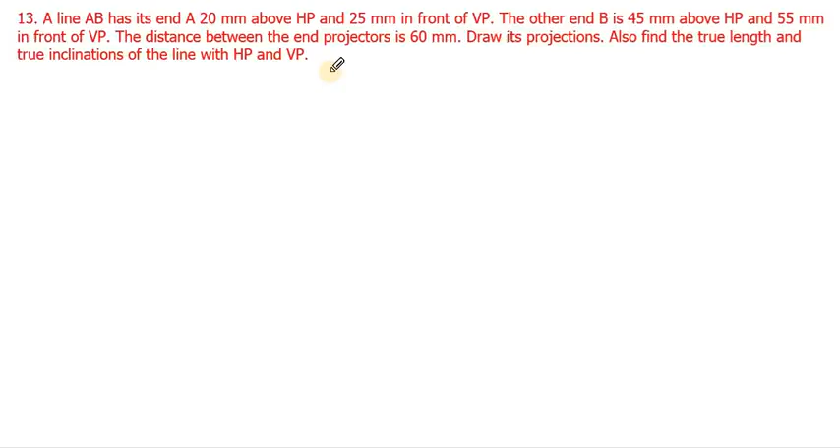So in the previous video we have seen a typical problem on projection of lines where the true length of the line has been given and we have calculated the true inclination with HP and VP. But here the true length is not given. We have to calculate the true length and also true inclination with HP and VP. So for that they have given end projector distance, that is 60 mm. So keeping this as a reference, we are going to calculate true length and true inclination and we will proceed with the projection of lines. So let us see how to do this.

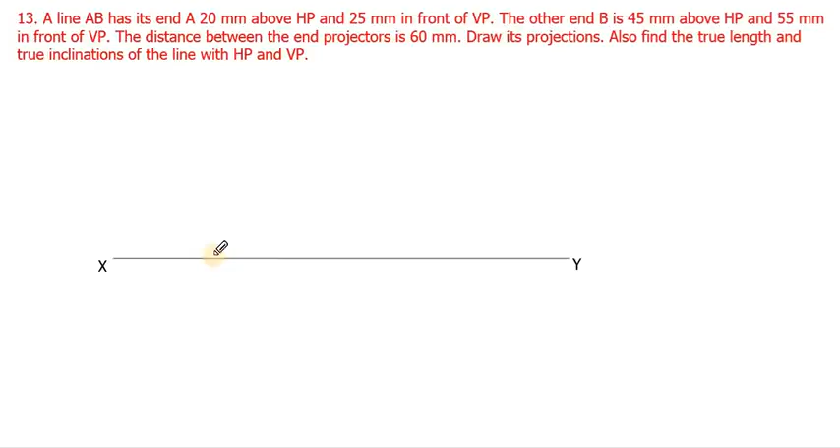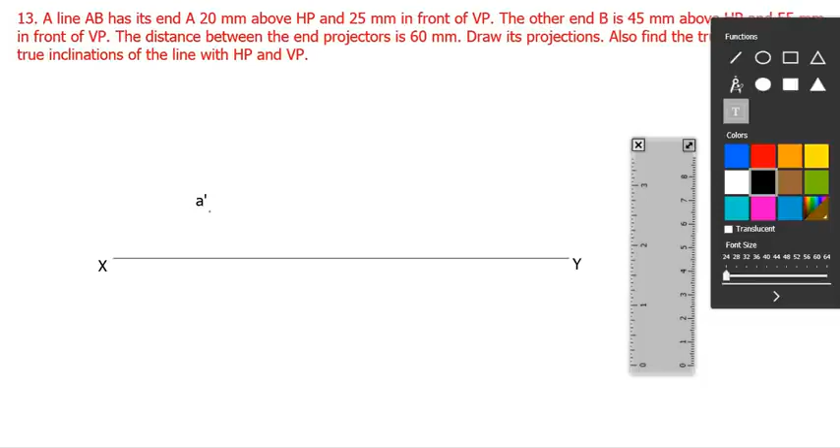So first, as usual, draw the XY reference line. After that, plot the above HP point and in front of VP point, that is A point. It is given that the end A is 20 mm above HP. So above HP will be above XY. So we can mark A dash point above HP, that is 20 mm. Take the scale, measure 20 mm from XY, above XY. So mark one point there. So it is A dash point. Along A dash, draw a straight line. This will be locus of A dash.

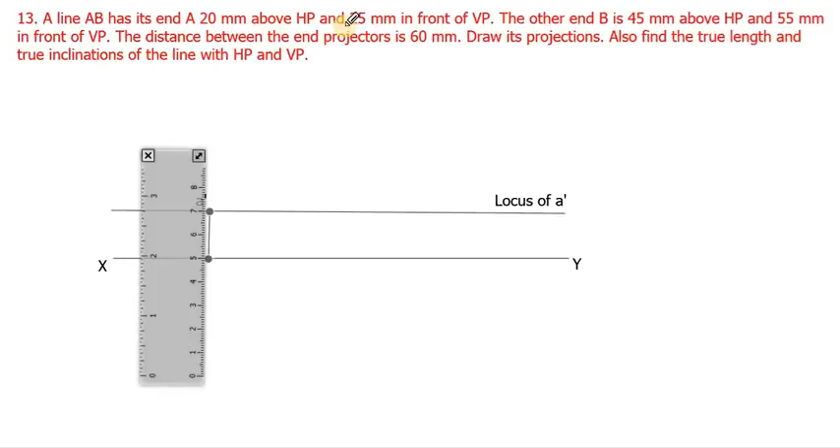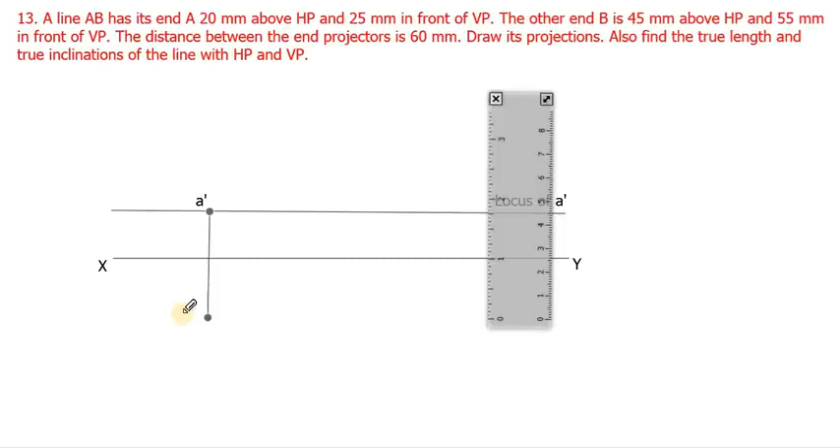Then from A dash, draw one straight vertical line up to XY. This is A dash projection line, and extend this line to 25 mm, that is in front of VP. Since in front of VP is given as 25 mm, just extend this line up to 25. So it is 20 and 25. So this point will be A point. Then draw a locus line crossing A point. So this will be locus of A.

Okay. Then it is given that the other end B is 45 mm above HP. So we can mark the locus of B dash, that is 45 mm from XY. Similarly, 55 mm in front of VP is given. So we can mark the locus of B line at a distance of 55 mm from XY. So that's what I am going to do.

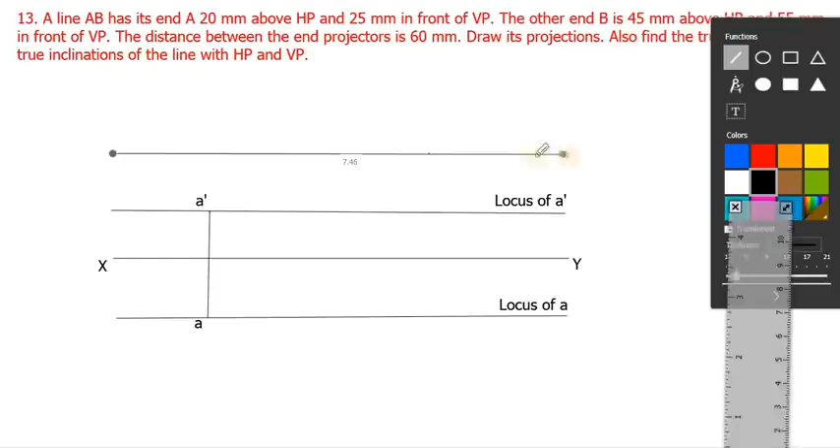Take the scale. From XY, mark 45 mm distance, that is above HP. So this is the point, 40, 45. Okay. So this is not B dash or B1 dash point. This is the reference point to draw locus of B dash. So draw a straight line crossing this point, that should be parallel to locus of A. So this line is locus of B dash. This is the line where B1 dash point and B dash point will meet.

Similarly, the B point is given as 55 mm in front of VP. So take a scale. From XY, mark 55 mm. So this is the point where locus of B will exist. Let us mark the point here: 10, 20, 30, 40, 50 and 55. So from XY, 55 mm distance. So draw a straight line crossing this point to form locus of B. So that's all, we have drawn all the locus lines. Make sure that all the locus lines and the XY reference line are parallel to each other. Better use a mini drafter to draw these parallel lines.

Okay. So we don't know the true length of the line. We have to calculate the true length. But the distance between the end projectors is given. So we know what an end projector is: the meeting point of front view end and top view end. When you connect those two ends by a straight line, that is called an end projector. So let us draw that end projector line.

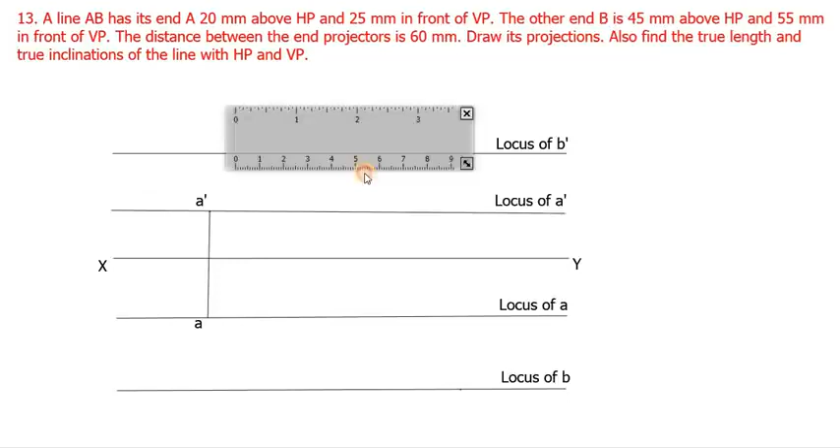So that is 60 mm from A dash. So this is the end projector line point. We can draw a straight line to form the end projector. I am using a different color for easy understanding. So this is the 60 mm line. Draw the end projector line, that is a vertical line crossing this point which we have taken 60 mm from A dash and A, up to locus of B and locus of B dash. So this point will be B dash and this point will be B.

Okay. So join A dash and B dash to form the front view. This can be drawn using HB pencil since it is the front view. So A dash B dash gives the front view. Similarly, join A and B to form the top view.

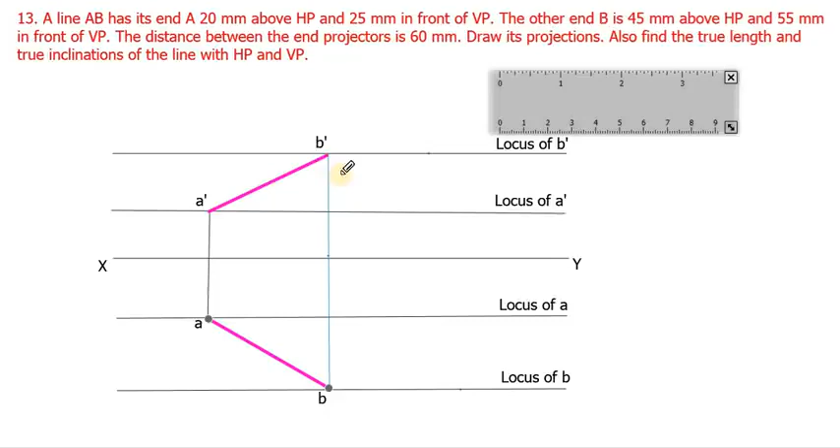So this is end projector. We all know the straight line that joins the end point of front view and top view gives end projector. Okay. So the problem is quite simple: to find the true inclination with HP and VP. So for that the true length line should be drawn.

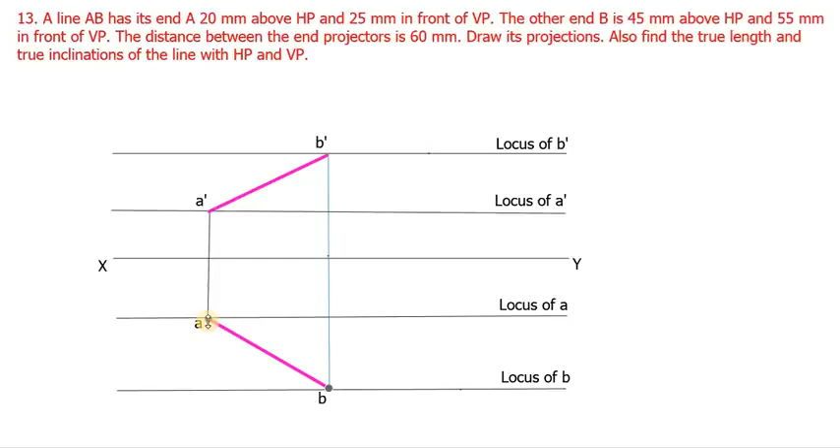So we all know how the front view is drawn using true length line. So we have drawn one straight vertical line up to locus of A from the point of B1 dash. But here there is no B1 dash. We have to find that point to form the true length line. When you watched my previous video, you could understand that we have drawn true length line first and then front view and top view.

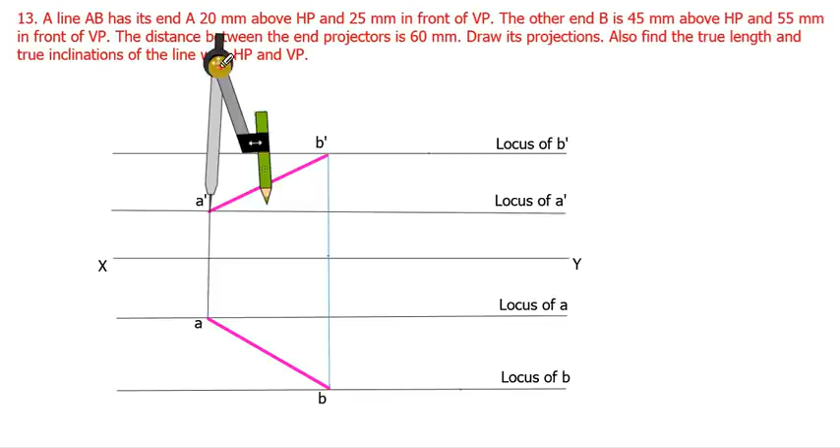But here front view and top view have been drawn already. Keeping this, we have to draw true length line. Okay. So the problem will be reverse of those previous problems which we have seen earlier. So just listen carefully. Take the compass from A dash as center and A dash B dash as radius. Draw one arc up to locus of A dash. So this point will be B2 dash.

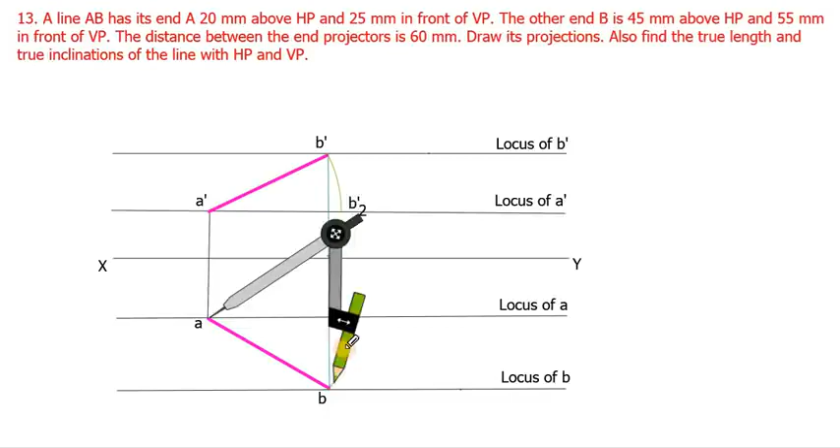So when you refer the free body diagram which I have shown in my earlier video, you could understand how this arc comes. So this will be B2 dash. Similarly, draw the arc taking AB as distance, towards upward up to locus of A. So this point gives B1.

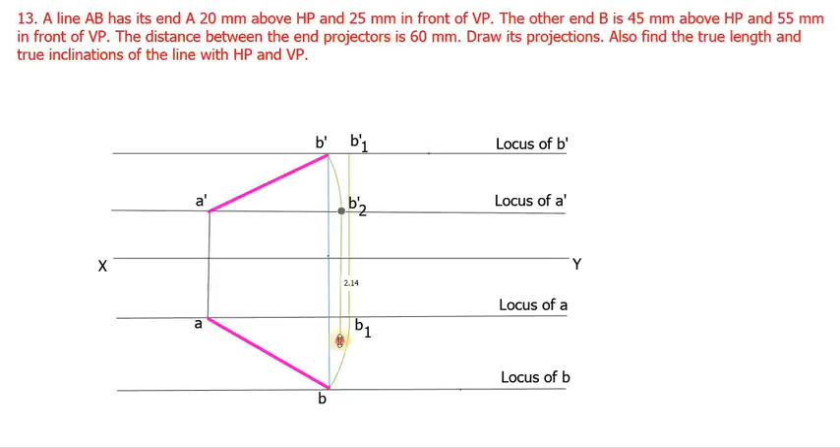Okay. Then draw a straight vertical line from B1 up to locus of B dash to get B1 dash. So from B1 draw one vertical line that should be parallel to A A dash line to meet locus of B dash at B1 dash. Similarly, from B2 dash, draw one vertical line that should be parallel to A A dash line up to locus of B. So this point will be B2.

Okay. Then join A dash and B1 dash to get the true length line. So this is the true length line with HP. Similarly, join A and B2 to get true length line with VP. So if you measure the length, this will be the true length line. So the length of these two lines will be equal. Also we can measure the angle, that is true inclination of the line with HP here and with VP here. So this will be theta and this will be phi.

Okay. So that's all the problem. So last and final touch should be given, that is we need to mark all the dimensions. You should not miss even a single dimension. Similarly, you have to write the answer here, that is they have asked to find the true length and the true inclination, so that should be written here. So let us first write the answers, after that we will mark the dimensions.

Okay, so first we can calculate the true length of this particular line, that is A dash B1 dash, A and B2. So just take the scale and measure the length of the line. These two lines will be equal. Similarly, take the protractor and measure this angle. So when you measure the length, it will be about 72 mm. So that can be written here. Okay, this is the answer, that is true length line is 72 mm. Just measure this, you will get 72.

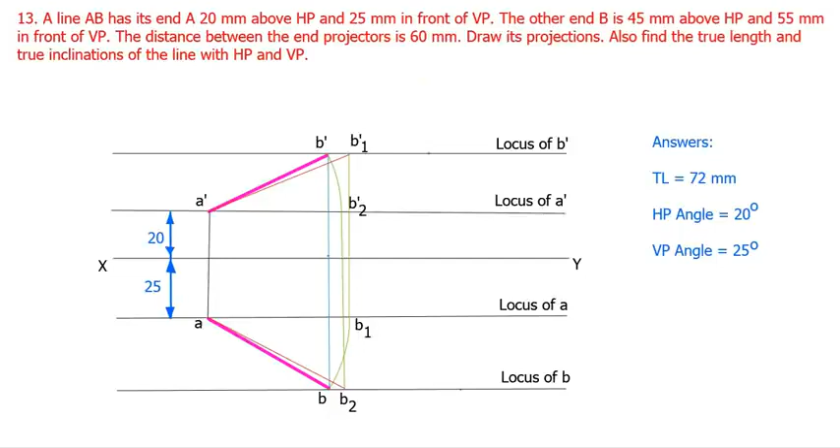Okay. So don't forget to mark all the dimensions that I will mark now. So this is 20 mm and this is 25 mm. Okay, no need to mention mm, just simply write as 20 and 25. Similarly, the true length line, so you can mark the true length line like this. So this will be 72 mm, so just write as 72. So similarly, on VP, just mention what is the length of the true length line. So it will be 72.

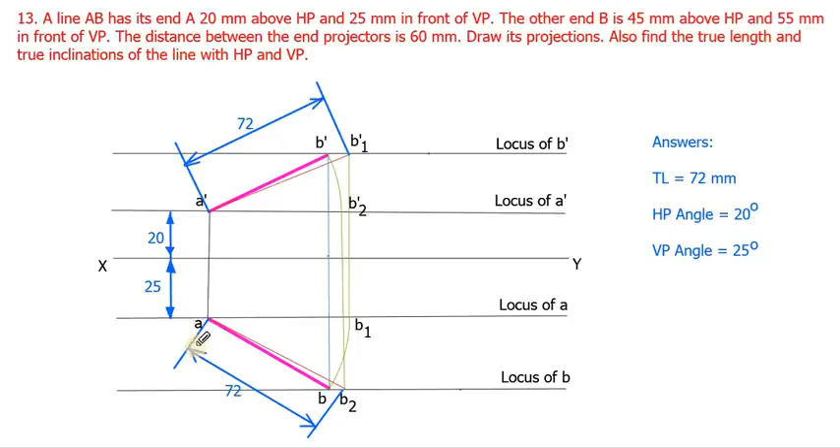Okay, so just draw closed arrowhead, don't draw like this. Since I am using software, I couldn't draw closed arrowhead in crosswise, so you should draw only closed arrowhead like this. Okay, so similarly, the end projector distance we have drawn 60 mm. So just mention that also. So end projector distance will be 60 mm. Okay, so that's all. We have marked all the dimensions.

Similarly, you can indicate here also as theta and this one as phi. Like this, you can mention this angle, that is theta. Similarly, this angle as phi. So this should be 20 and this should be 25. Okay, so write here all dimensions are in mm.